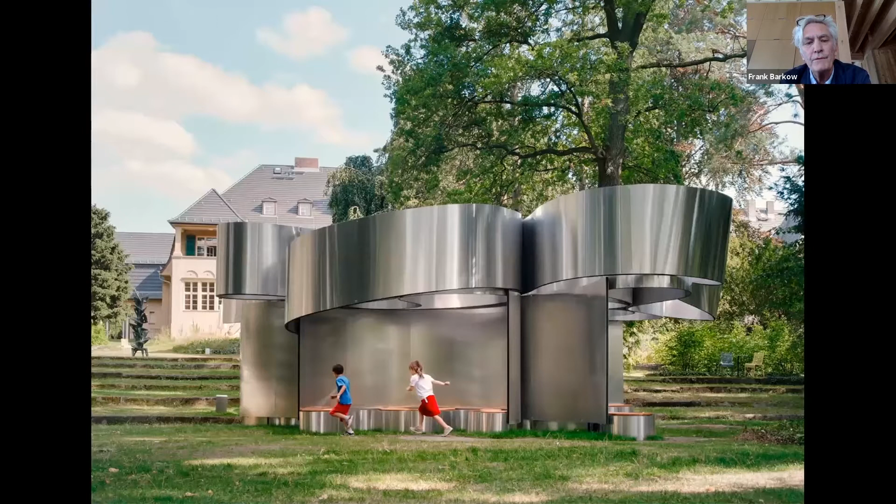This is a pavilion that we moved from Serpentine Galleries in London and rebuilt in Berlin as a kind of prototype—an experimental idea of creating form and space in the setting of this really beautiful garden there.

As an example of the way we work, this diagram shows, as Fabiola was saying, that we work between research and academic teaching at Princeton, where we've been heading studios on housing and affordable housing, and the practice, which is primarily based in Berlin, Germany. So it's a way of working between these work areas.

Timber is something I wanted to give background on, what we've been doing with timber in the last few years. I got tapped on the shoulder by Sarah Whiting, dean of the architecture program at Rice, who asked if we had done any timber buildings. I said, sure, we've got plenty. So these are examples of ideas we've worked with in timber, thinking of it as a modern, forward-looking, even futuristic material, in terms of sustainability and ease of working with it, ultimately earmarked for this project for Hanszen.

This is an example of a cantina, an event space in Stuttgart, Germany, where we used glulam construction in conjunction with steel. This is glulam, digitally drawn and cut, and prefabricated outside of Stuttgart in the Black Forest. It serves as a social space for an industrial campus, where everybody meets: white collar, blue collar workers, clients, employees. As a common space, it was important for us.

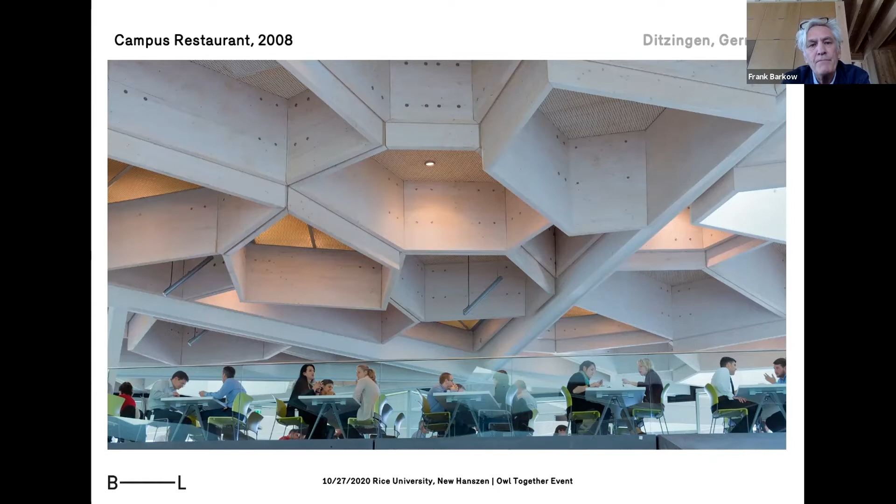But it's also a building where we started producing components that could be digitally fabricated off-site. We could design, fabricate, and execute these building components through our own design, in a sense creating our own building catalog for our own buildings.

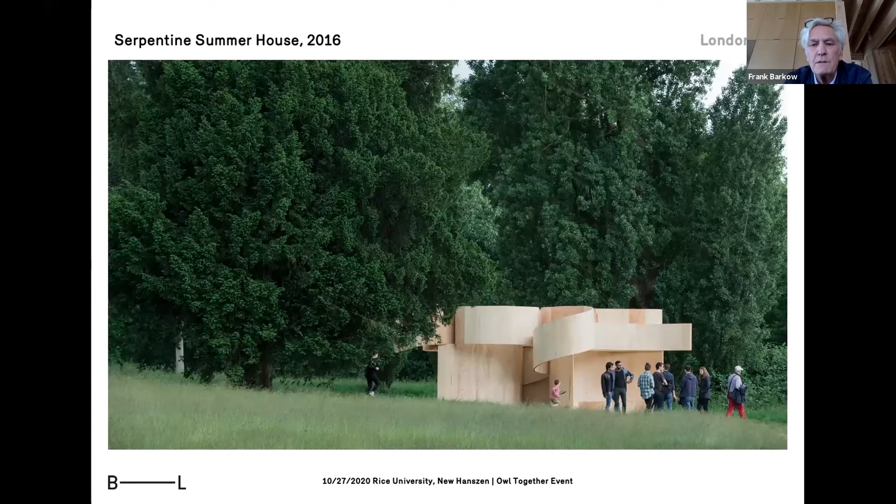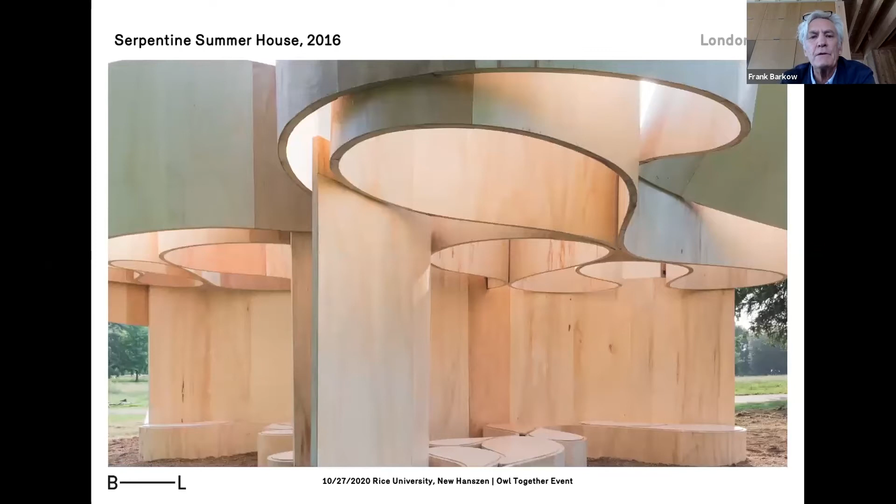The Serpentine Summer House, which you saw a version of earlier, was the pavilion—an experimental project as a prototype that could expand and get bigger. It was built for the Serpentine Galleries, for Julia Peyton-Jones's summer house program, as a temporary structure within the beautiful Kensington Gardens, later moved to Berlin. Really it was to test the limits of material, in this case steel in construction with plywood, the limits of bending it, how it conditions light, how light comes through.

It was achieved through the very simple exercise of folding and looping a material around itself. So the practice is, in that sense, very much hands-on.

This temple-like building in the Swiss Alps is actually a factory. The Swiss are great workers of wood, so they were happy to create this post and beam structure out of local timber, which was glue laminated and built in a simple beam and column system for flexible industrial spaces.

The building could be fabricated very quickly and put up very economically. In a way, these were some of the first projects where we cut our teeth on this idea of prefabricated timber or wood construction.

We also used this approach for other campus settings, such as for Fraunhofer, a famous German research institution, for their campus in Bavaria, also in a very beautiful Bavarian, village-like alpine situation.

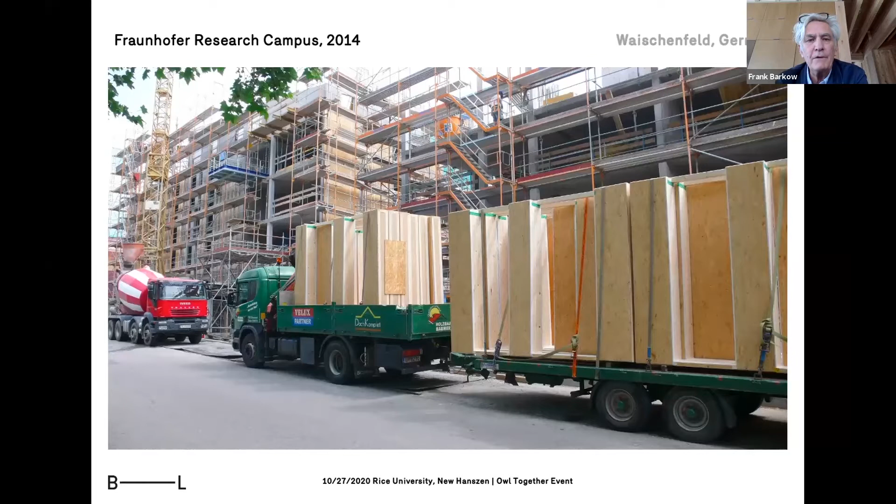This image shows how those buildings are built, where we construct timber components off-site. They're prefabricated and then brought on-site so the buildings can be built quickly and beautifully. This is the entrance sequence. You can see it in relationship to the historical buildings around it, agricultural buildings and barns, and the idea of a timber structure as a common space uniting the four dormitory and laboratory spaces for Fraunhofer, as a collective gathering and event space.

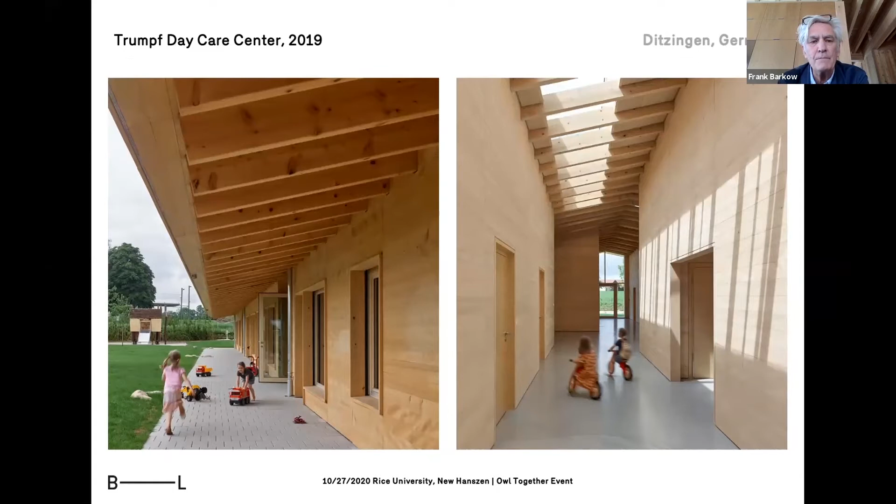These are examples from the last 5-10 years of projects we've been doing, including very recent ones, such as this small daycare or kindergarten adjacent to a factory in Stuttgart, with green roofs that we plant, as well as prefabricated wood components for these small children's classrooms, meeting spaces, and play spaces for gathering—again, a building that could be built off-site and brought on-site quickly, put together economically.

The other idea of timber is like the exhibition we had in Berlin. This one, for the Chicago Architecture Biennial, is to think a bit more utopian—the idea of timber high-rises.

This is something we tried for Sid Rich. We're not quite that far with building legislation, but this is an idea for a high-rise for affordable housing. In this case, very simple, using log construction that's stacked over each other. Timber is very available and very cheap in places like Berlin, as an idea for a future kind of project in the works, an idea for housing. So it's both a very pragmatic, research-based project, but also one that's forward-looking.

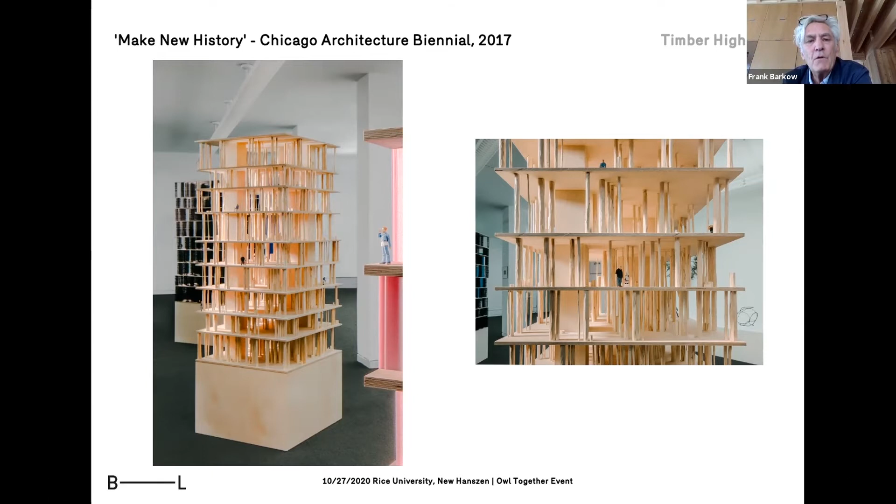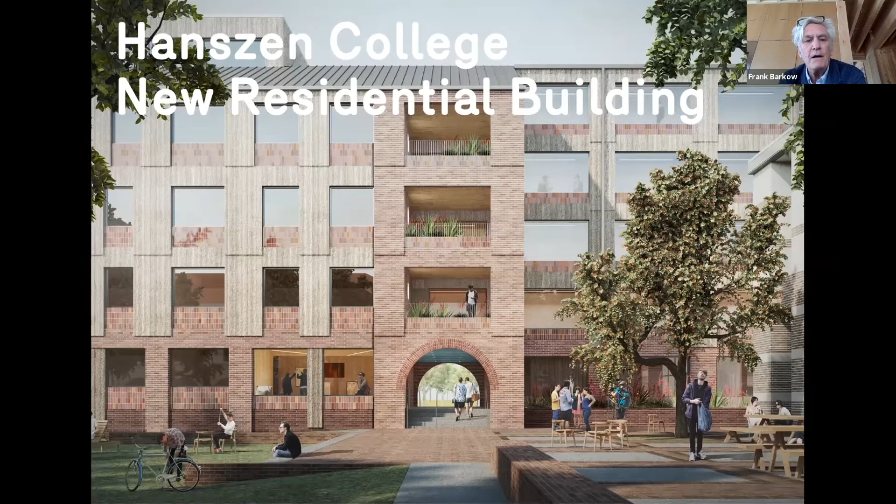So with that as a background to our work and research, I wanted to focus now on Hanszen, the new residential building or wing we've been working really hard on for the last few months. To give you a little background on how the project was started, we went back and looked at some of the histories of Rice. We looked back at the Beaux-Arts plan from 1910.

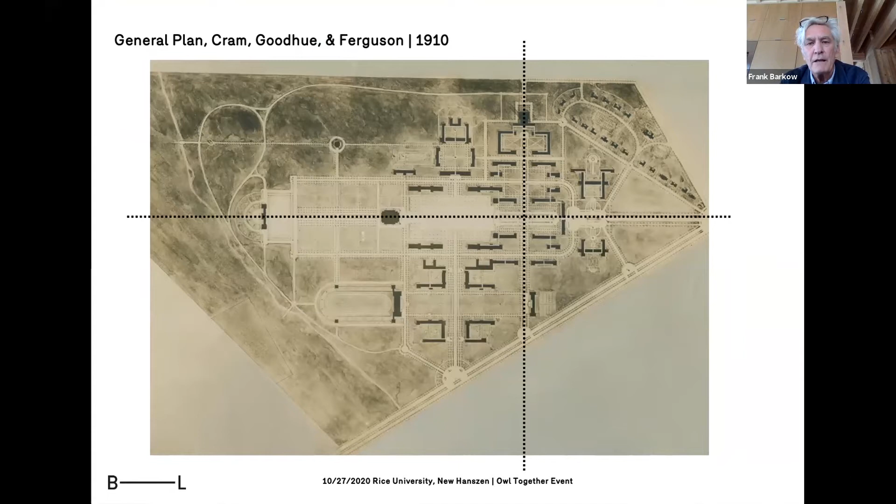Beaux-Arts was the French education style of these large axial, symmetrical master plans. Over time, that master plan has evolved and changed quite a bit from the original conception. At the same time, some of these ideas are still in place. The north-south and east-west axes are still in place. The residential colleges are still located at the edges of the campus.

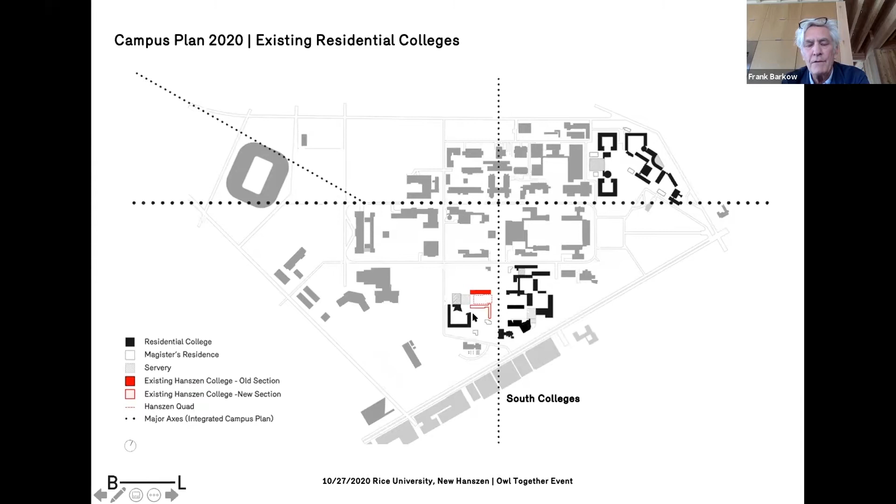We are looking at Hanszen, at this site where the old wing from 1957, the historical wing, is replacing that and complementing it, again to reinforce this idea of a quad space, a collective space between the two buildings in that particular location. So one of the other things we did, because we like to do this as academics, I guess...

...was to do a kind of lexicon or survey of the architecture on the campus of Rice, which is fascinating to me because Rice was always an incubator for architecture over the years, of different styles and phases and movements of architecture, and has a long history of having some of the most progressive architecture in the country.

Of course, the first buildings were in this classical style, which aligned and were consistent with the original master plan, through the 50s and 60s. Modernism made a very strong showing on campus, love it or hate it. I still find a lot of these buildings quite interesting.

In the 80s, postmodern architects of quite renown, such as James Stirling's addition to the architecture building, Anderson Hall, Cesar Pelli's work, Michael Graves, had an enormous impact, I think, on the campus through the 80s, as well as, I think, a collection of quite excellent contemporary buildings from Thomas Phifer's Pavilion, Kieran Timberlake, who are pioneers in sustainability, as well as Michael Maltzan's Moody Center for the Arts.

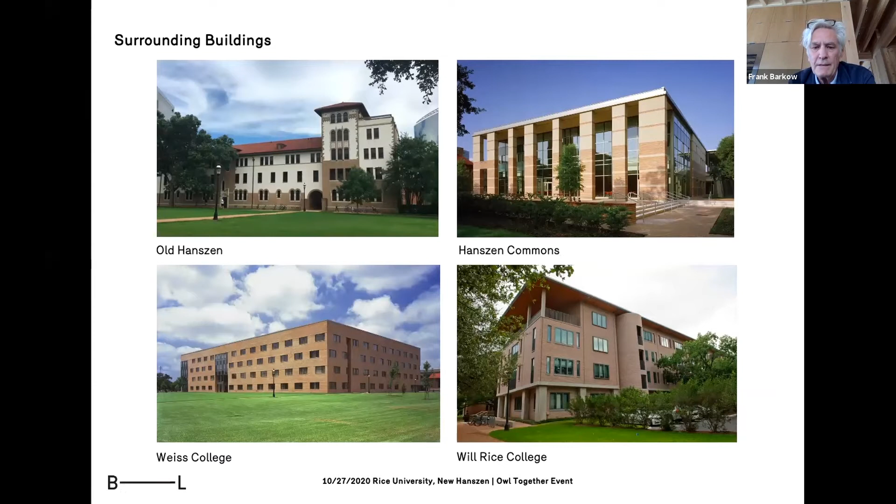The Hanszen Commons on the upper right, which is this more modern building, has a double height arcade facing the quad, as well as the Weiss College building, also from the same architects, as well as the Will Rice College building, which is also a relatively contemporary building.

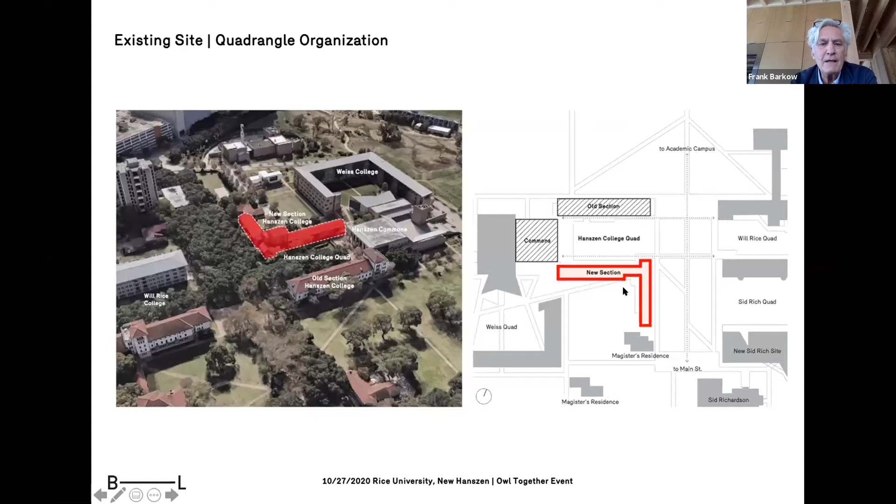So the existing site that we had to work on was in the area of the quad. This red footprint is the existing '57 building. Our site is meant to be located here, shown in red, between the Hanszen Quad and to the south.

The challenge for us was really how to articulate this building mass to fit within this relatively complex site, tailoring it to fit with the idea of generating dormitory rooms and common spaces, and how that might work.

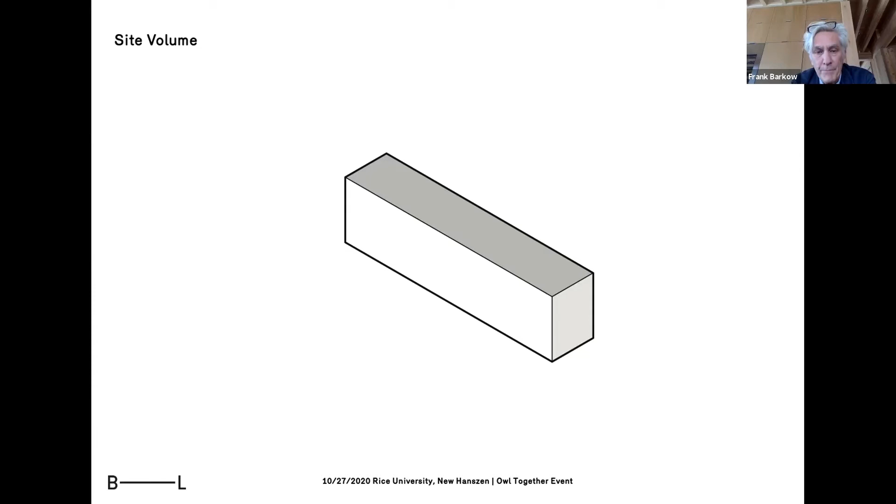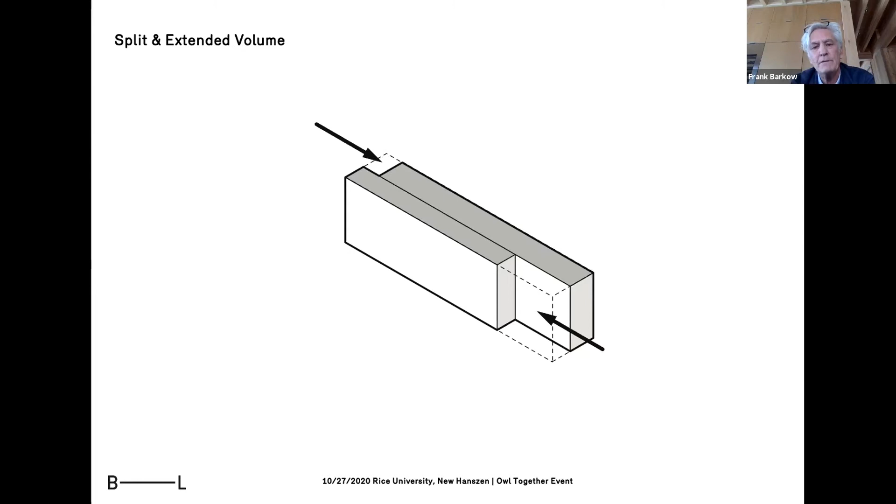So we started with a very simple diagram of the possible building volume that would work with this site, then began to shift and slide those volumes to break down the mass of the building, but also to tailor this volume better to this particular site.

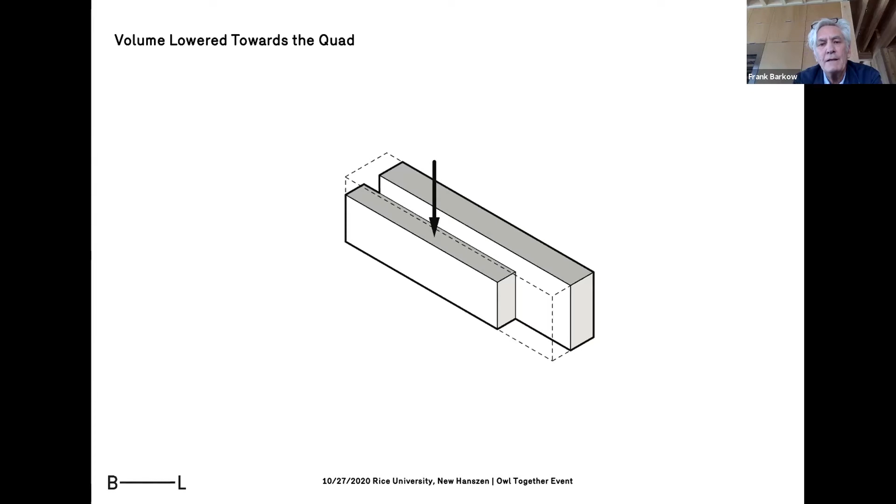Another thing we wanted to do was to lower the building on the quad side, to the left, to bring it more in scale with the historical wing across from it, and to have a higher volume facing south towards Main Street.

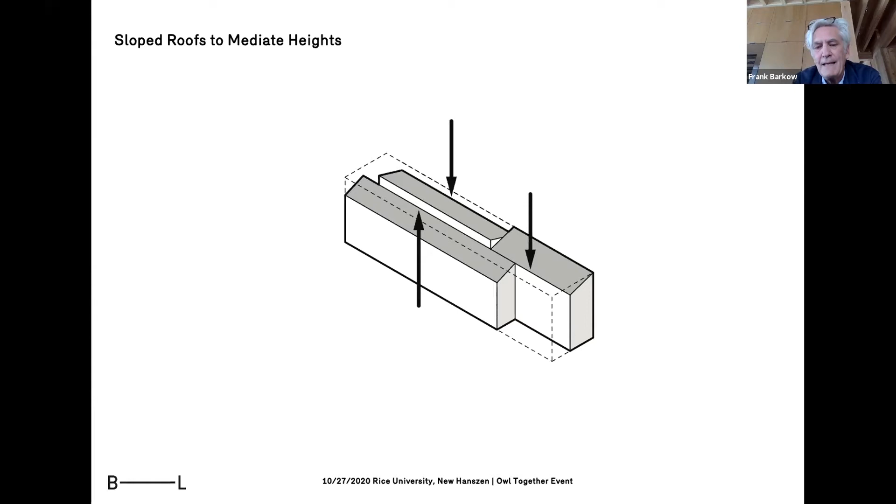The next idea was that Rice is predominantly a campus of roofed buildings, hip roofs, shed roofs, so we articulated the building in a series of shed roofs, again to help scale the building down, but also contextually to put it into a dialogue with the neighboring buildings.

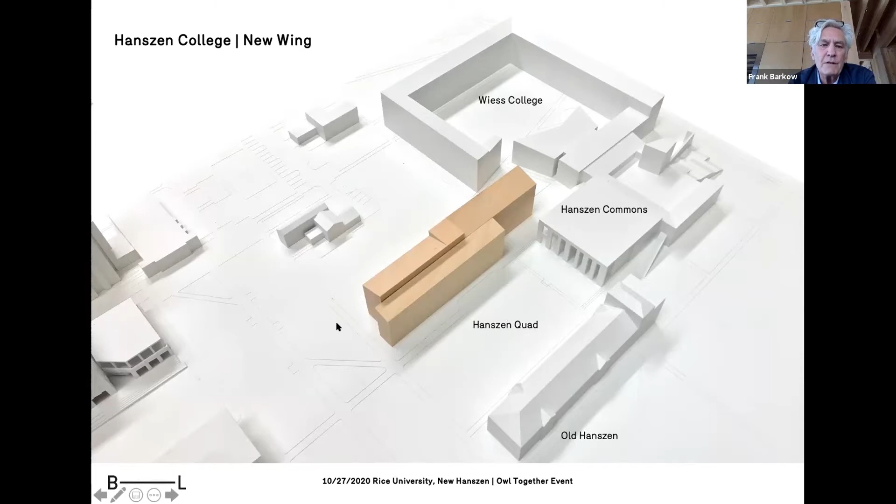In this sketch massing model, you see how the building slips into the space between Hanszen and Wiess, blocking Wiess up a little to the other side, and strengthening the relationship to the Hanszen Quad. That space is something more private, belonging exclusively to Hanszen, as well as having a strong address to the south and to the Grove next to it.

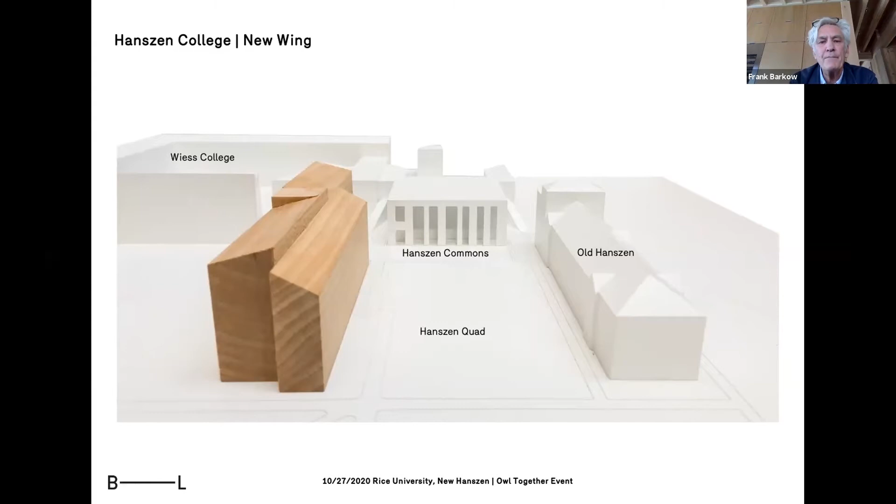In this view, you see how the massing, even though it's a relatively high density building, brings it in scale to the Hanszen Commons and the old Hanszen wing. What I mean by in scale is a similar height between these three buildings that form the Hanszen quad.

This is sort of jumping ahead. This is a sketch model, a model we work with in our shop, that shows some of the ambitions of the facade articulation.

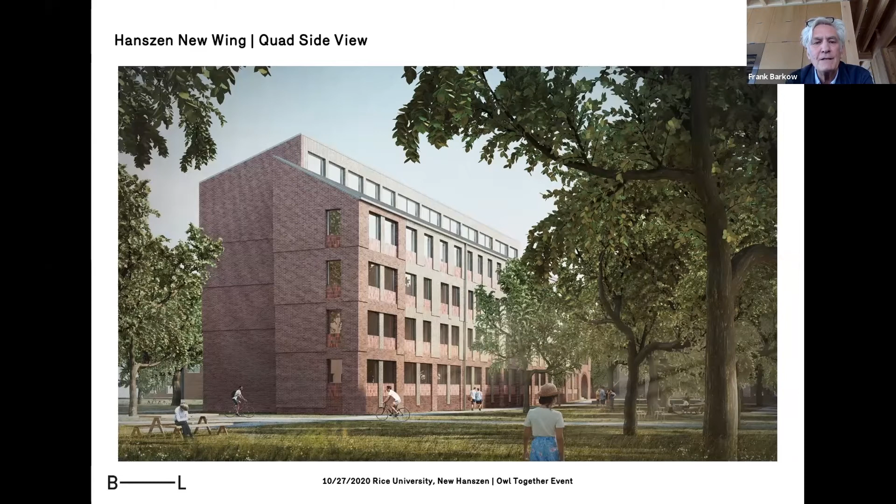We wanted to work with a kind of depth of the facade that's not flat, with the idea of doubling windows - I'll go into this in more detail with the elevations. This is a quick image of the massing and articulation of the building, which you can see better from the quad side, looking from where the grove would be, in terms of the material palette of the building - brick and plaster - and how that's articulated through the massing, as opposed to the south-facing facade, which is a story higher, facing south and to the west side of the campus.

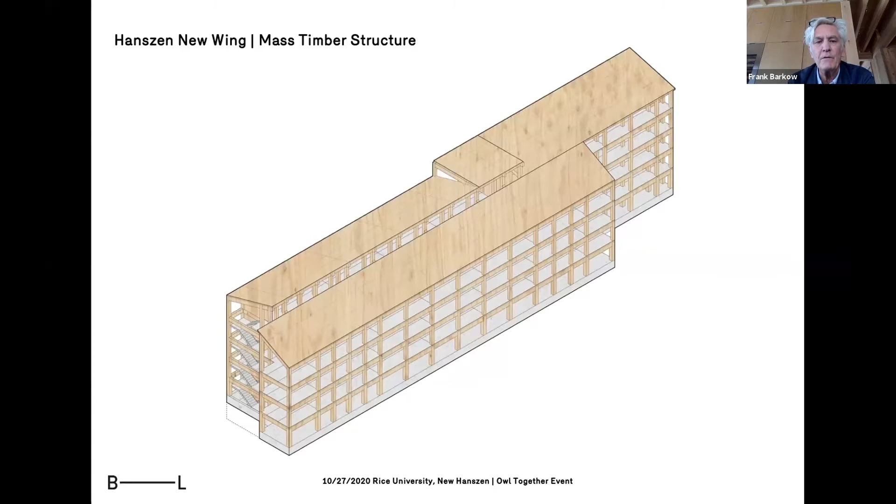Just to talk about mass timber construction specific to this project - again, this is a pilot project, a kind of pioneering project in the sense it's the first mass timber project on campus. The structure is post and beam, meaning you have posts or columns and beams made out of glue laminated timber. The floors are CLT, cross laminated timber, almost like a plywood kind of construction, to create this skeleton or base structure of the building.

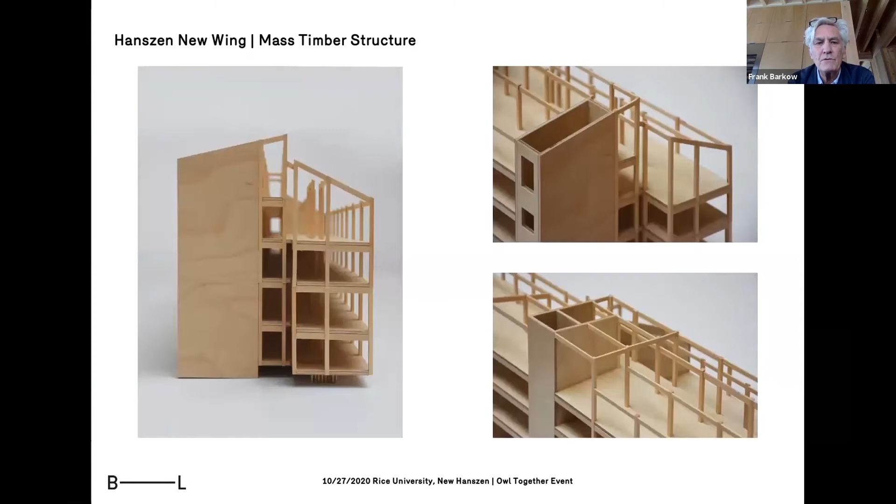Again, it's attractive because it's quite sustainable. It's also a lightweight structure. It can be built off-site and then brought onto campus.

So as said, it's the first mass timber construction on campus. It's already been awarded a grant from the US Department of Agriculture. It will be in line with Rice's environmental agenda, and quite interestingly, though it may not speak for this building, I think Rice owns 50,000 acres of timber in Louisiana, which could in a sense be a kind of crop that could be harvested for future buildings on campus.

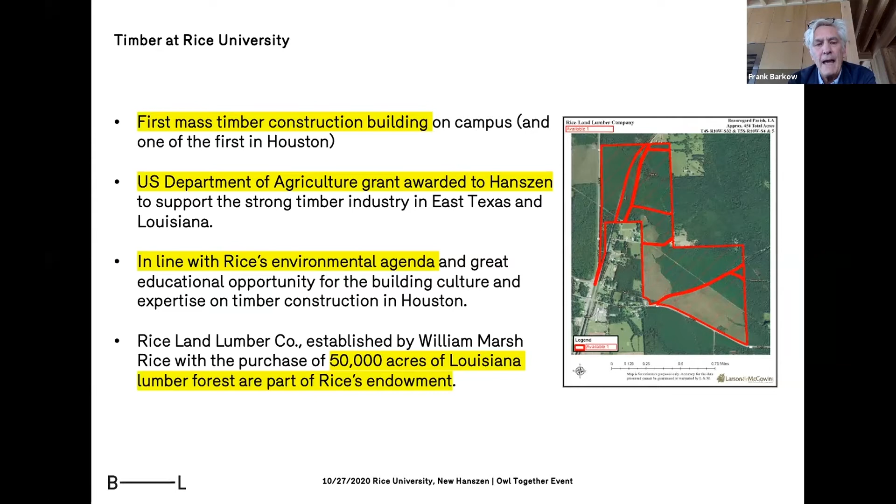So our hope is that with this building we can create a kind of prototype for future construction on campus that provides a low carbon footprint, that has this efficiency through prefabrication - it's economical, it's precise, it reduces time on site, these logical, pragmatic aspects of it - and can be locally produced.

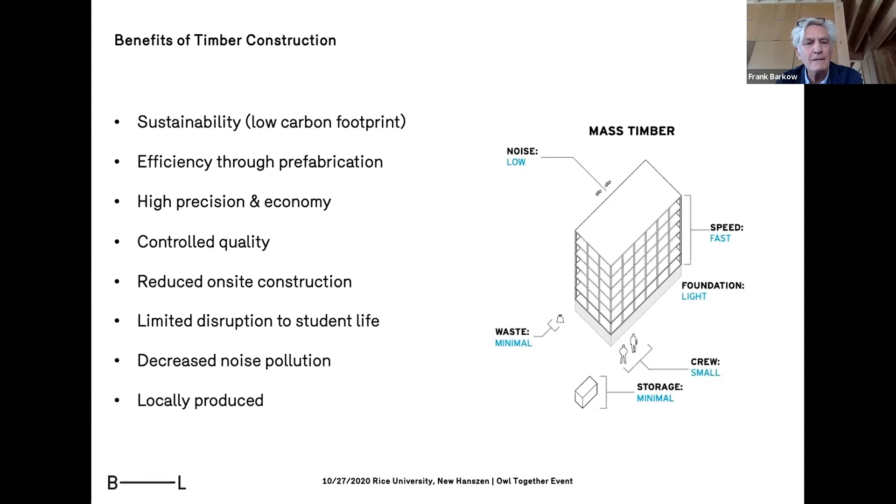But at the same time, I think it's an extremely beautiful material, very haptic, warm. You can see the timber in glulam construction behind my screen here, from a house I just completed in the same kind of construction, which is an extremely livable material to be around.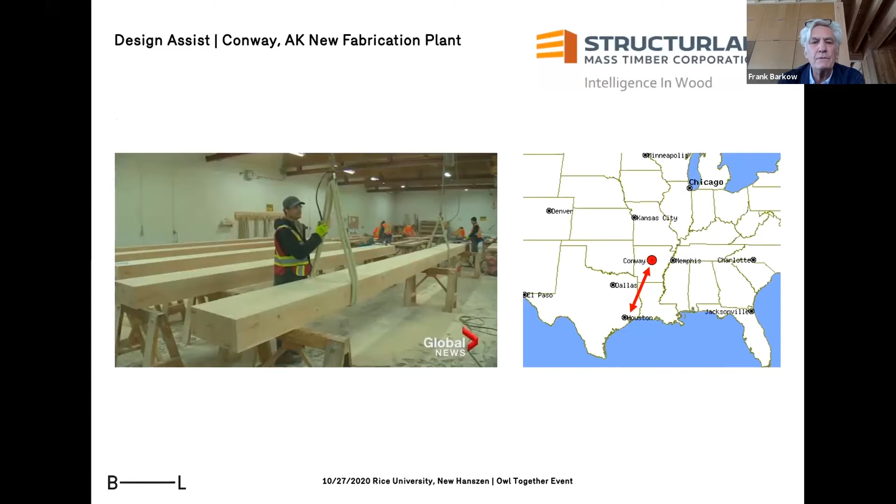In terms of logistics, we can build this building in Arkansas, in Conway, and just ship it down to Houston. So in a sense, it is a regional material that can be sourced from not far away. As I said, it's extremely beautiful.

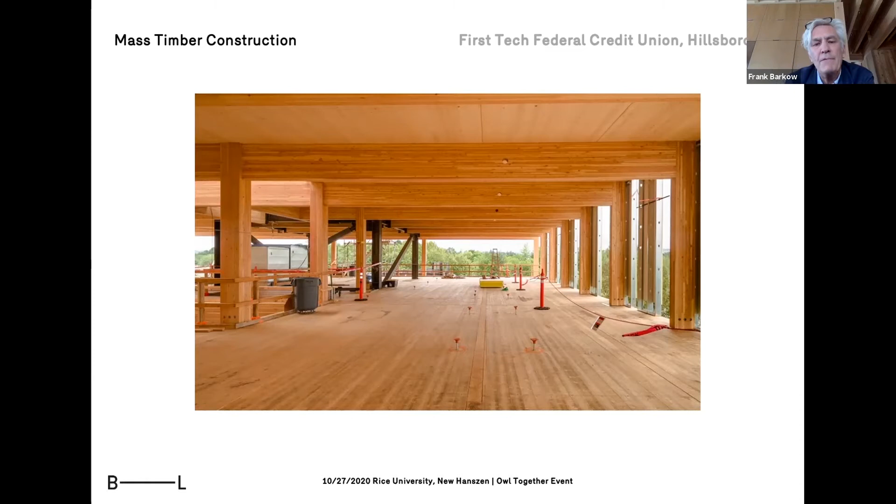This is an example in Oregon of post and beam construction in glue laminated with a CLT. Again, this cross laminated timber floor decks, which we will then coat in concrete to improve the acoustical performance of them. So it's quite a cool material in the sense of its ease of moving and its aesthetic beauty, I think.

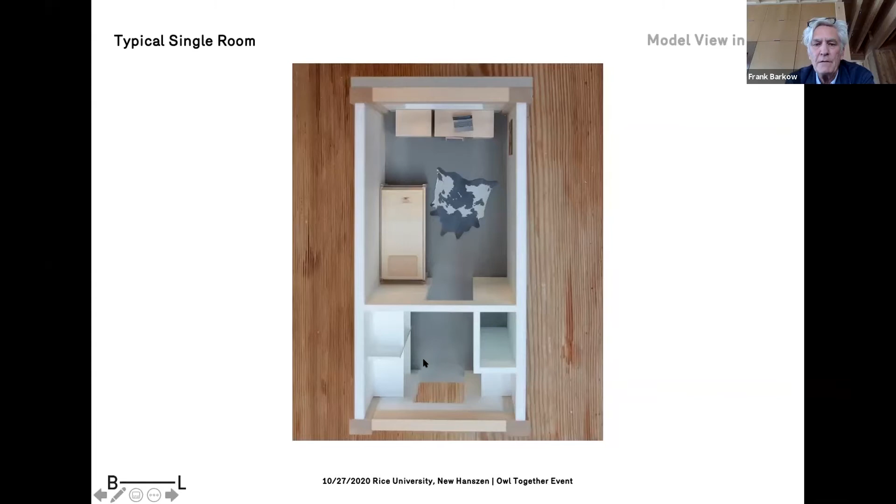The new Hanszen dorms, to zoom in on the building itself, we're developing single rooms, doubles, and RA rooms. So this is an example in our model. This is kind of a view looking from above down into the room as a single here with a storage space here. The bathrooms are shared in a common hallway.

Which look like this from the inside, a study space, a bed. It has a certain amount of flexibility in terms of how you furnish it, how you can move the furnishing around. But what you can see is the sort of visibility of the construction.

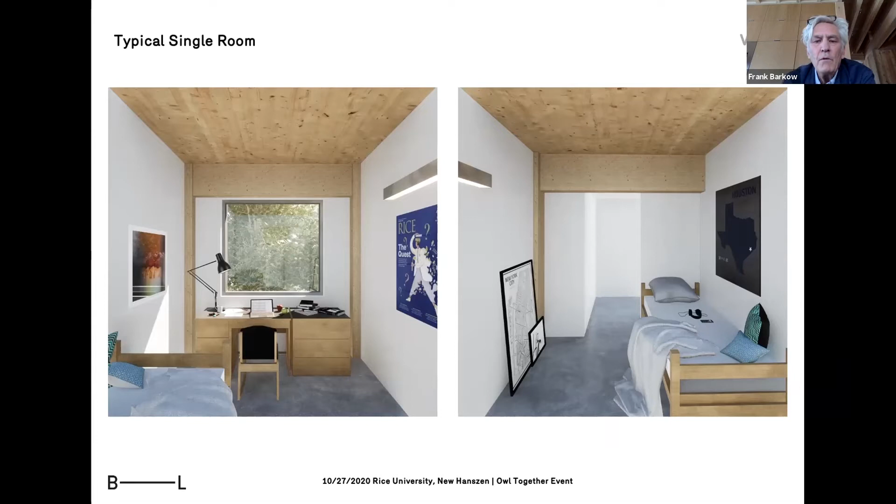So the ceilings will be the exposed timber, as well as the beam or header over the window, and columns are visible. The concrete floor will also be visible. So the rooms will be quite robust in a way. I think we wanted to achieve a kind of loft-like character for these spaces.

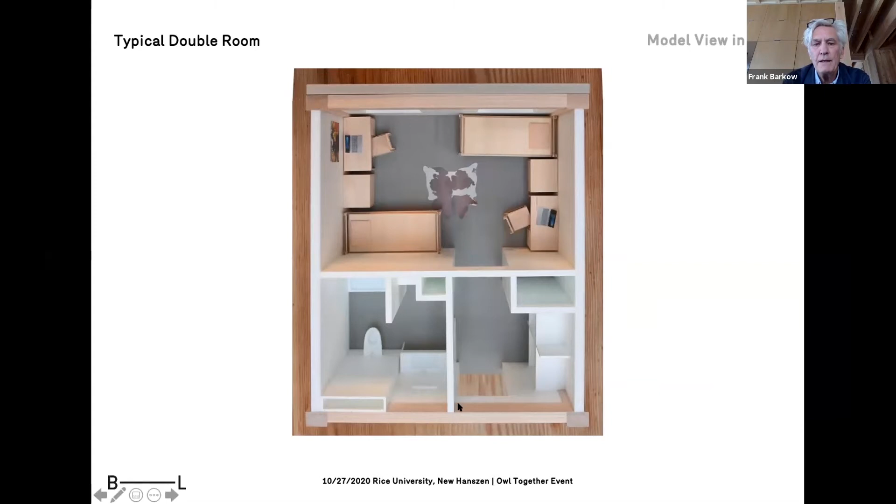This is an example of a typical double room, again, which is flexible, which has its own designated bathroom. Here, a kind of entrance foyer with storage as a base type, or the majority of the rooms will be this kind of room, with both looking at the window or facade side and looking back towards the entrance and the view.

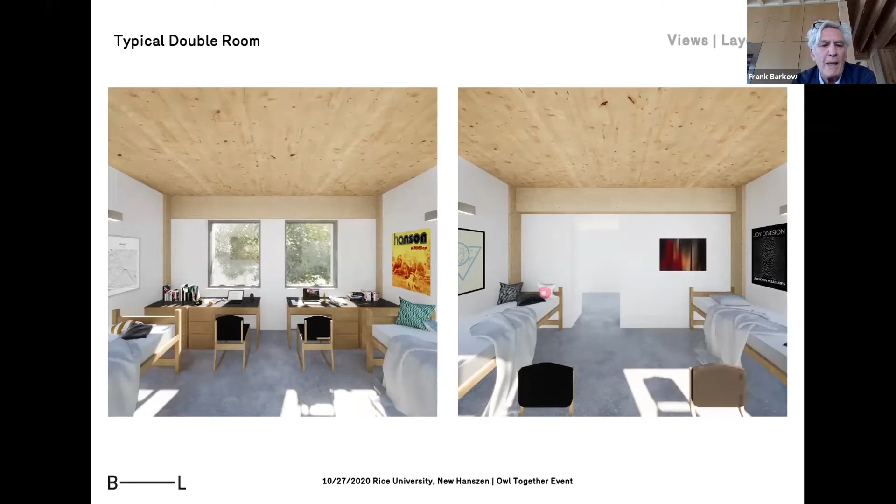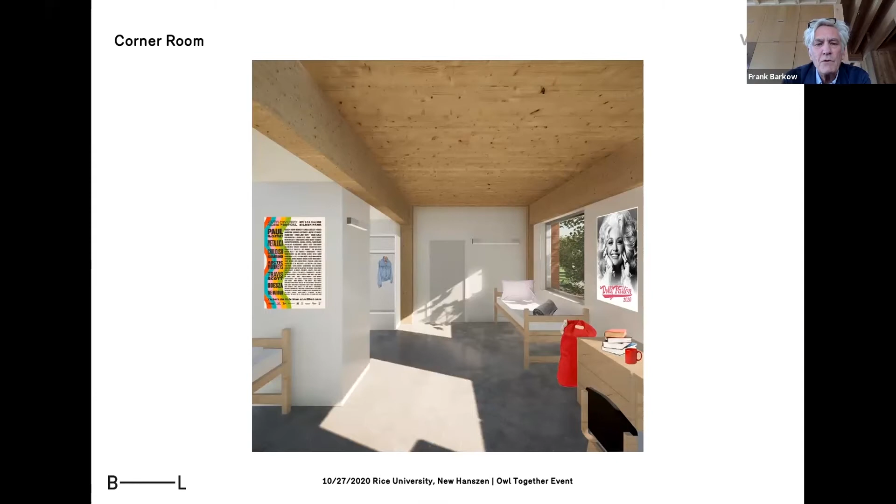On the right, again, can be flexible, can be rearranged in terms of furniture, beds, desks, however you want to use it. And then we also have corner rooms, which have windows on the corners, views in both directions. These are double rooms, which are quite nice. You even get an extra window here next to the Dolly Parton poster, which we can provide.

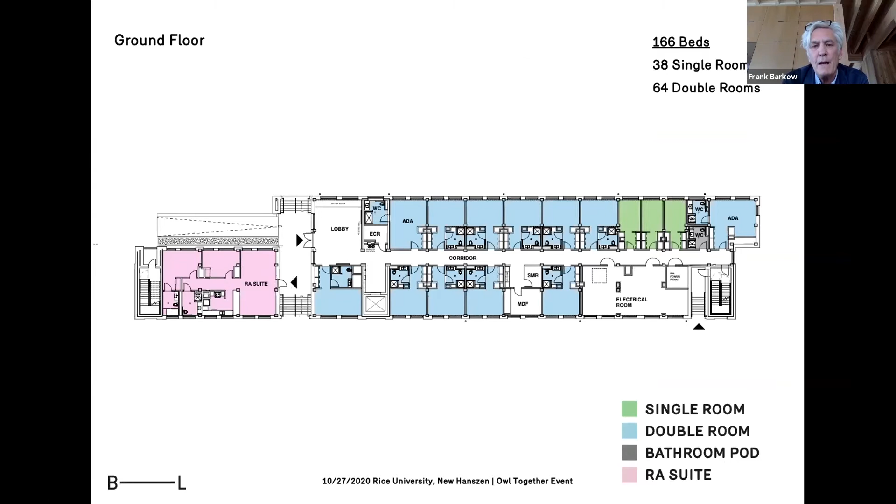And you can see the distribution of single rooms as well as double rooms at this floor. A typical floor works this way with this combination, and again, we have 38 singles to 64 double rooms, but you see the distribution of rooms in this floor plan. And you can also see we generate common spaces such as these outdoor terraces or loggias, I'd call them, on the corner here, as well as places in the corridor where people can sit and work or meet and talk.

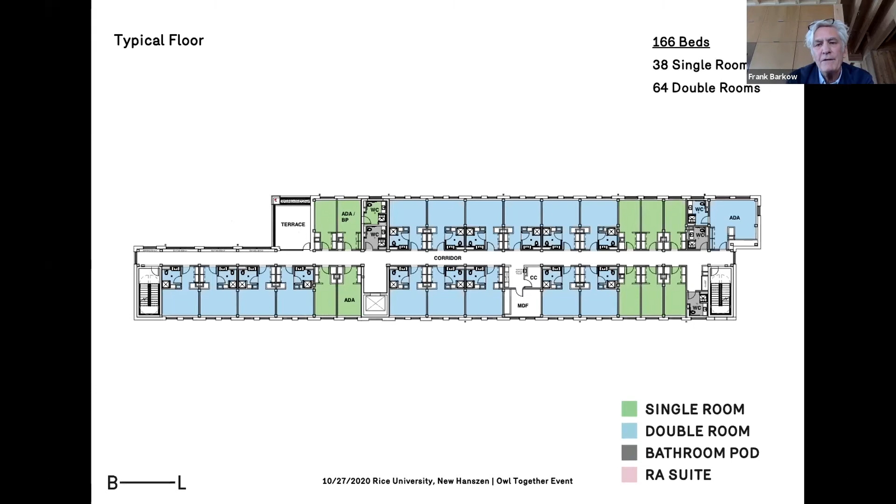So to be as efficient as possible, but to generate as much architectural benefit as we can with a building of this type. The fifth floor, or the top floor, becomes a kind of single loaded suite of rooms, both double and single, as well as another RA suite here. As you remember from the model, this has a clerestory lighting to the corridor.

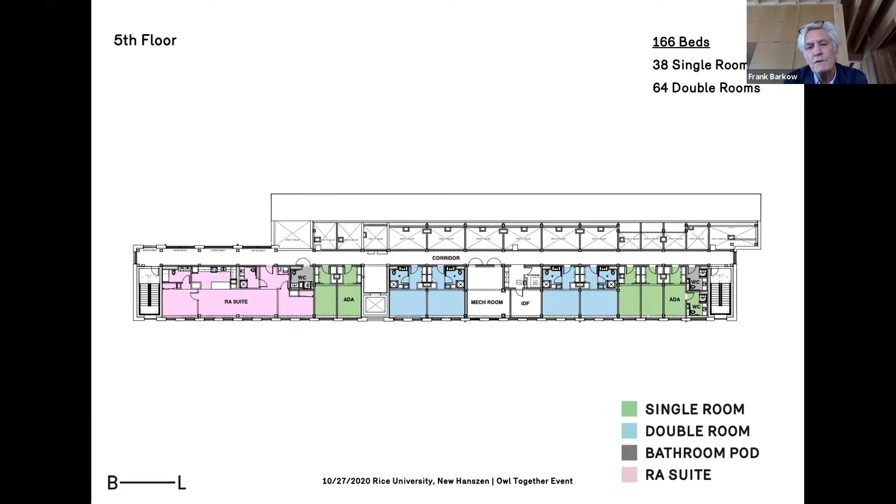These rooms also have a kind of higher roof or shed roof over them. So I think it generates a lot of differences in terms of types of rooms and where they're located, views and orientation. So in a sense that will be quite dynamic in these floor plans.

The RA suites are super nice. The one on the ground floor has light and view orientation on both sides. Similar to the rooms, the singles and doubles, we also wanted this to have a kind of rough and ready, loft character to concrete floors, again exposing the construction.

Timber wherever we can, and generate another RA suite at the fifth floor, which is daylit and has views on one side, but has the added benefit of these high sloping shed roofs on this higher space. So this is an example of what that space would be like.

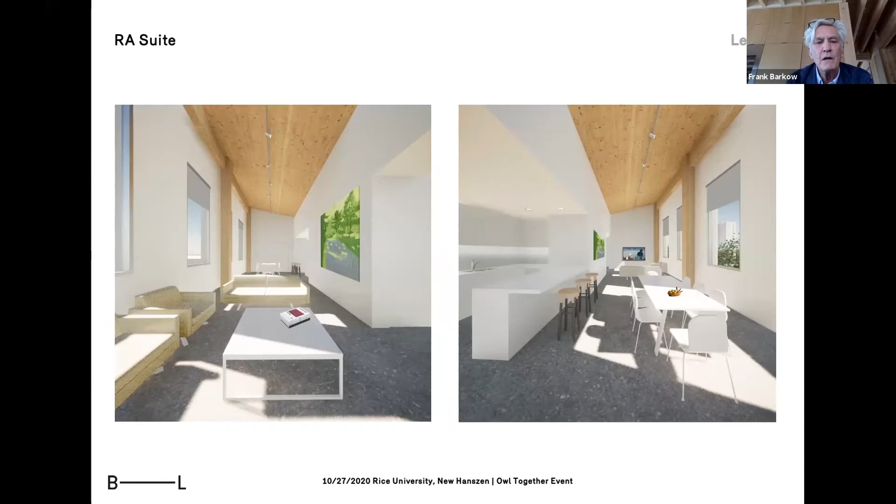Again, loft character: open kitchen, open living and dining space, forming kind of enclosed loft spaces.

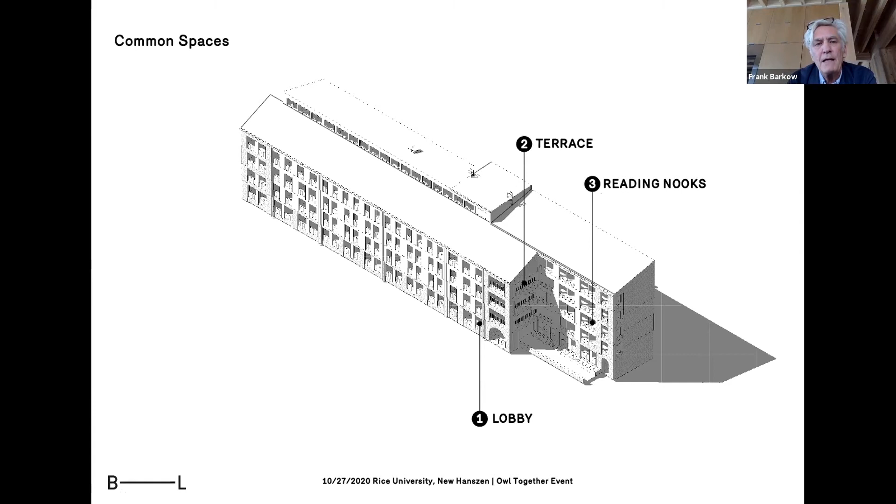The common spaces I talked about include the lobby, designated as a common space, these three exterior terraces or loggias given over as common spaces, and the reading nooks along the corridor on the upper levels. The Commons building is down here to the left, adjacent to this building, but even within the new building, we wanted to generate as much common space as we could.

In the drawing here, this is an example of the lobby space where you could sit and hang out. There's a chalkboard, a pinup board in the back, and a screen, so you could project movies, get information, or use it as a meeting point. But this is really the entrance to this residential wing.

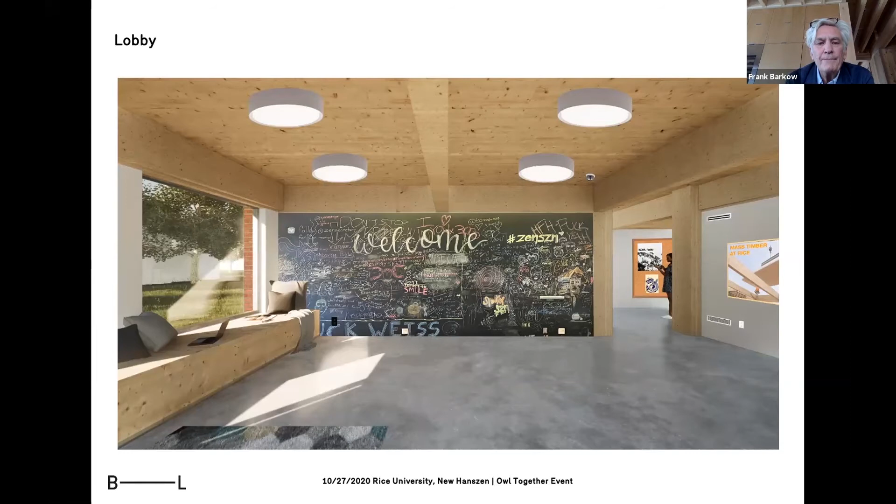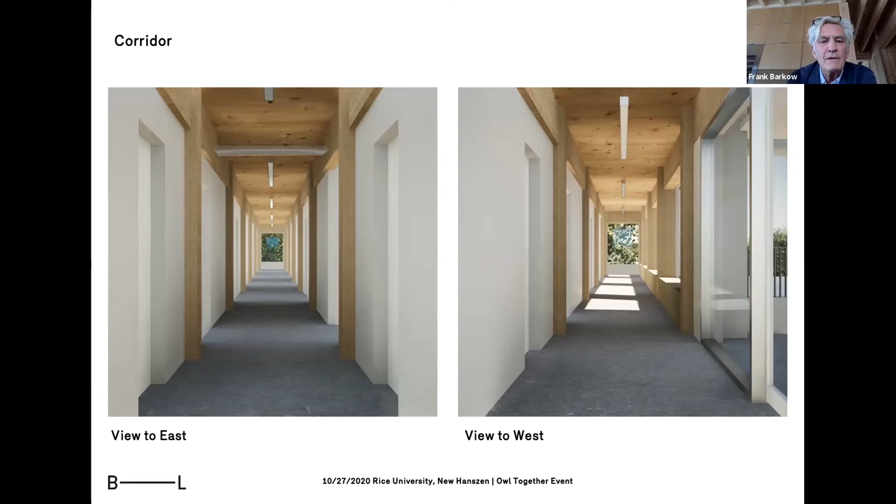Other spaces, like the corridor, want to have some quality of their own, again expressing the structure. There are views out of the corridor on both ends and on the right. It's daylit where it slides, and that shifting plan brings daylight within there, as well as places to sit and work within the corridor while waiting or hanging out, shown in a bit more detail here, where you can sit, plug in, and meet people.

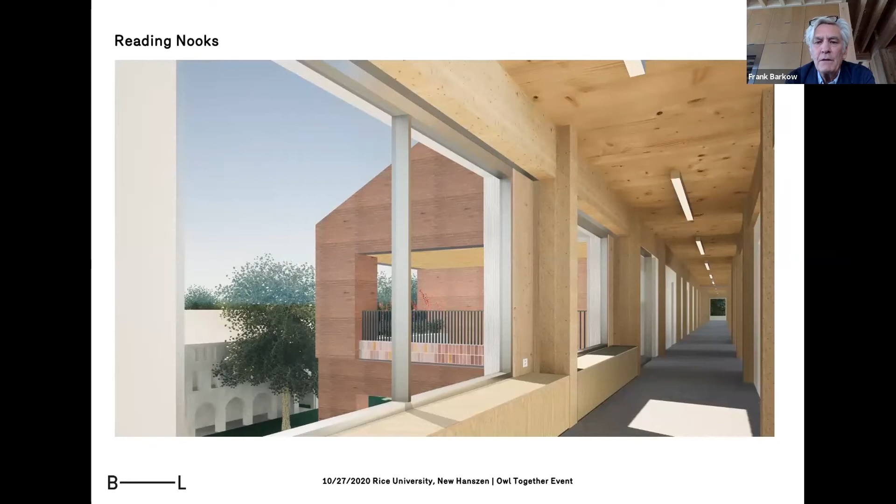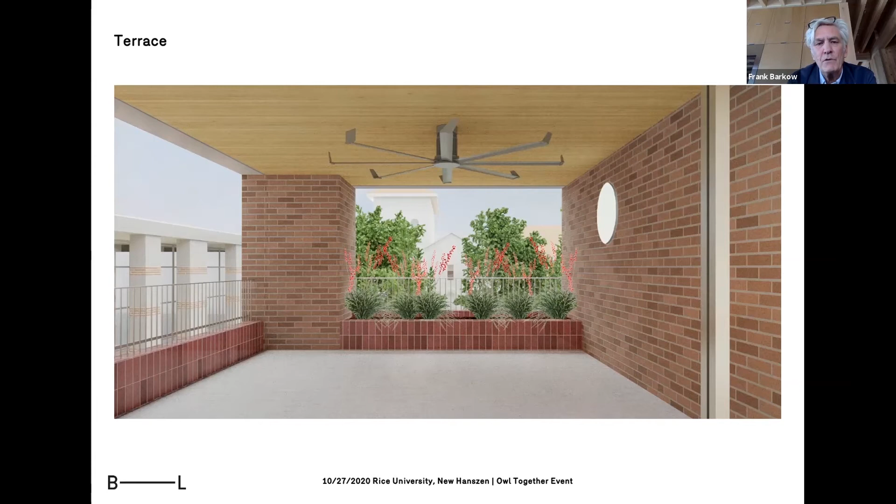This also has the added benefit that it's adjacent to these outdoor terraces, which you can use for workspaces, meeting spaces, or party spaces. So that's an added benefit: the corridor and how it connects to these outdoor terraces or loggias, as I would call them. The facade is another sort of theme within this overall building.

We've been working hard and intensively, in the last couple of months, doing lots of Zoom conferences and meetings on this issue. But the idea of the facade was that we see this as a modern building, and we wanted to do a modern, progressive, forward-looking building, but also wanted to understand the history. The history of Rice was that residential colleges would be slightly different than institutional or classroom buildings, using plaster, using brick, producing a more vernacular kind of architecture. So this nonchalance or informality was something we wanted to register in this new building.

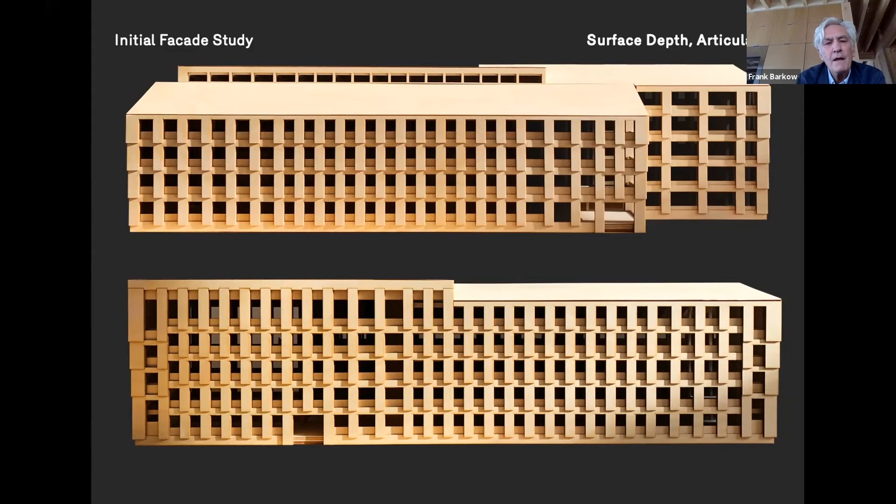We wanted the facade to have a kind of surface depth. It works in a shingling fashion of stepping over, taking advantage of the strong southern light—this idea of light and shadow articulating the facade, not simply being a flat surface that's either in light or in shadow, but playing with the depth of that.

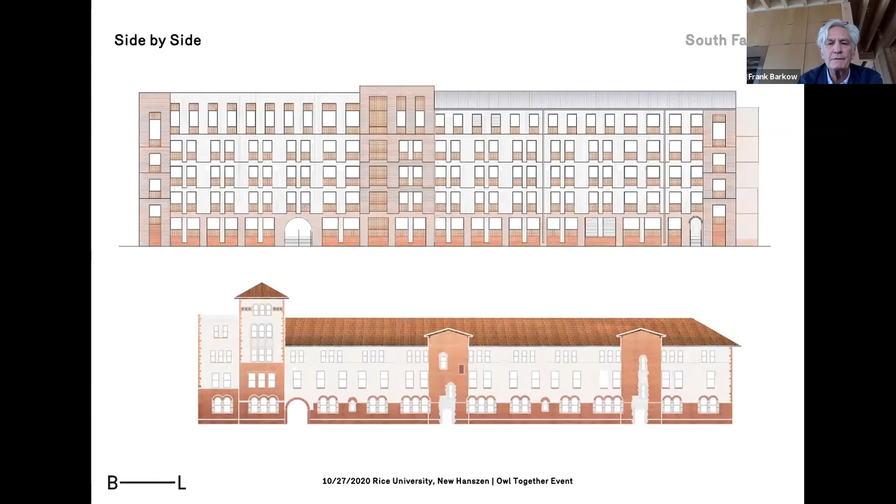In the more recent versions of this facade, we started to give more hierarchy and a more dynamic facade in terms of pairing windows. If you look at the historical building, you see how windows are grouped, how they're offset, sort of quoting the arched entrance passage through here, riffing on this idea of towers—marking or forming a tower-like element both at the entrance and bookended at the other side, as well as on the end here, as a way of referring to the historical buildings without copying them directly.

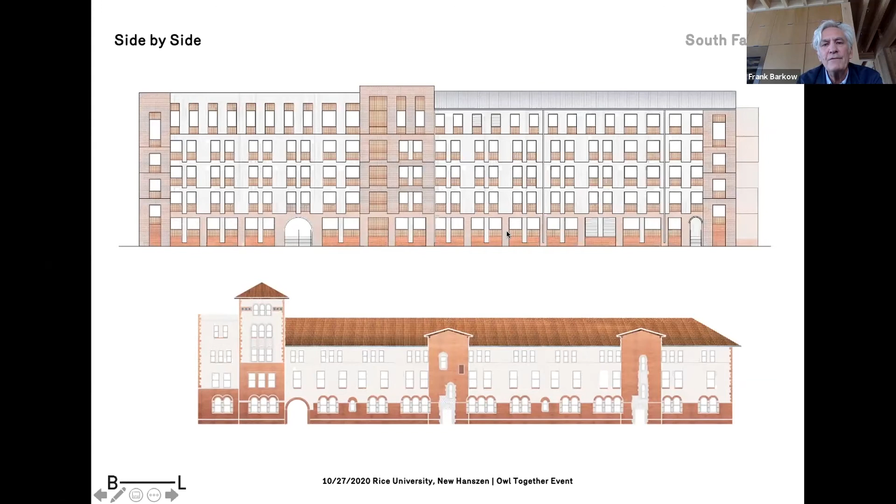Again, this is a palette of plaster, a metal standing seam roof, brick in the towers, and tile infills in and around the windows. So the palette then looks like this. On the right is the St. Joe brick from Louisiana, which is typical to Rice University.

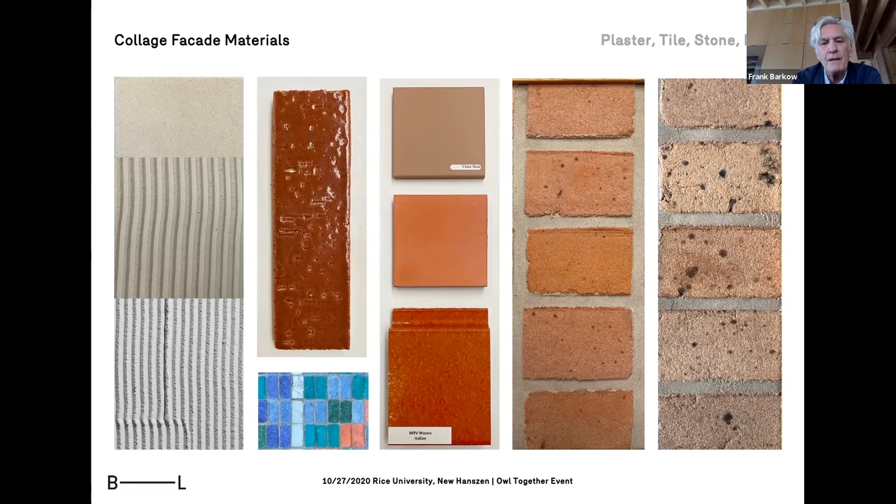Beautiful tiles in terracotta, even salvaging some of the mosaic tile from the 1957 Hanszen wing, which we'll use in the entrance ceiling or soffit, and plaster. Even that material, not simply putting it flat, but raking it, giving it a texture which plays in light and shadow, so the materials have a kind of richness and depth in themselves within this building facade.

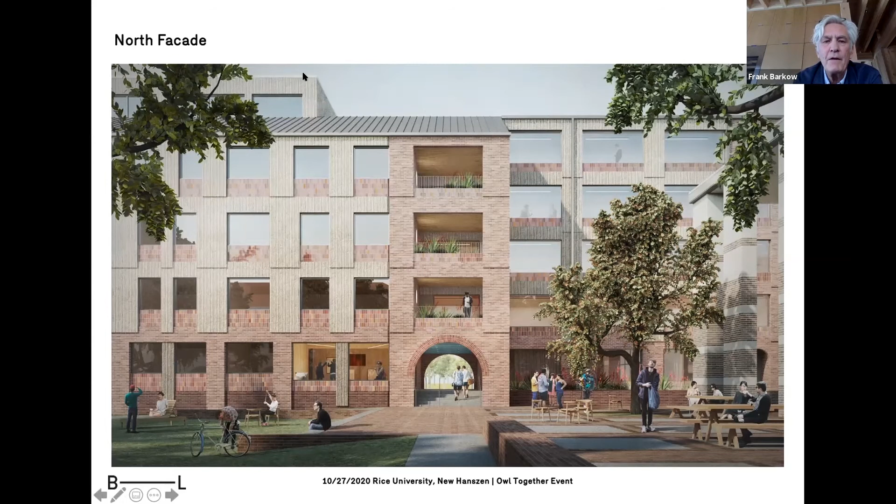So you could see where those materials would be placed within the facade. This is the plaster, these are areas for the tile. You can see my cursor, and the brick and the base, and again these tower elements here. This is pronounced at a corner, where the entrance throughway to this Hanszen wing is, with three open air terrace loggias above it, and a standing seam metal roof above that. These windows here are the clerestories which light the corridor at the fifth level.

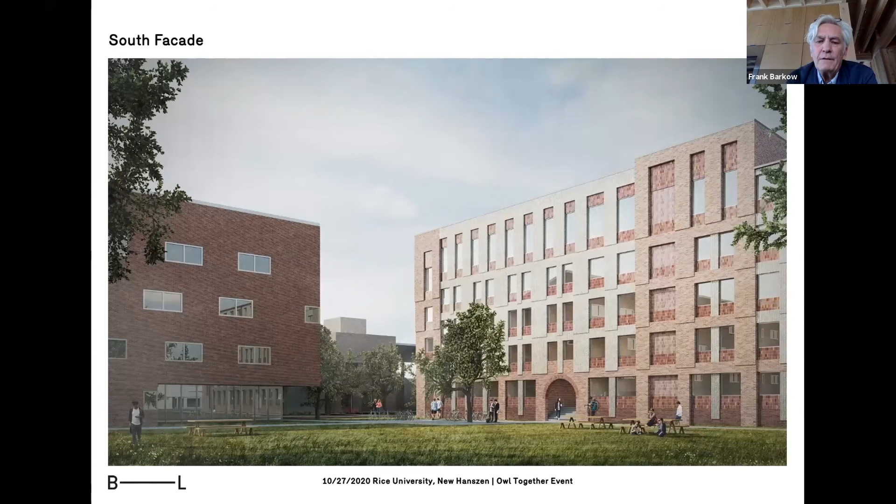So in contrast, in a way, to Wiess, which is a very simple, kind of punched facade, ours is much more articulated, I think materially more diverse, and more in line with the historical quad at this view looking to the south.

Iconography was another aspect, a particular history to this college in terms of the terracotta panels, the Guardian, the Passage - things we want to make specific to this college. The blue tiles, by reinstating some of those ideas such as the Passage, are something we want to salvage and reuse, replace or relocate.

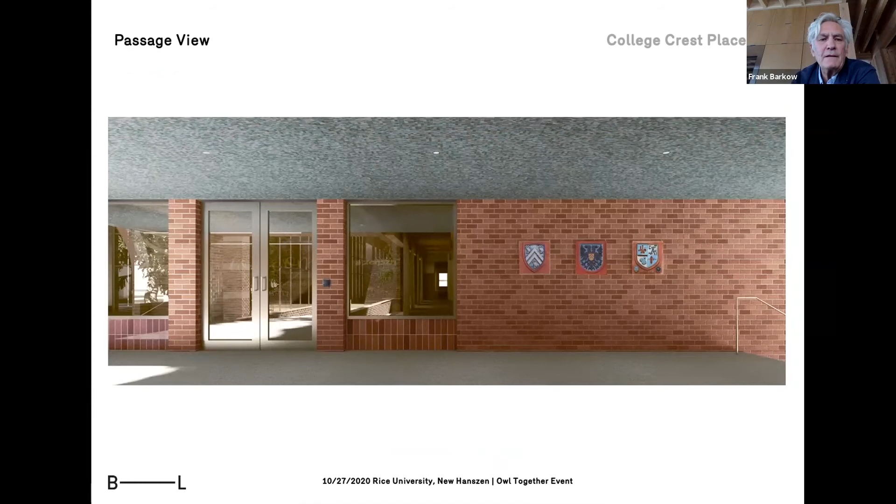One of the things we wanted to bring on board were the college crests and mosaic tiles, which are quite beautiful, and to bring them into the new building. So the crests can be located here through the Passage at the entrance to the Hanszen lobby. And this soffit or ceiling, I think we have enough material to place those really beautiful mosaic tiles into that ceiling space, which again play very nicely in the changing light.

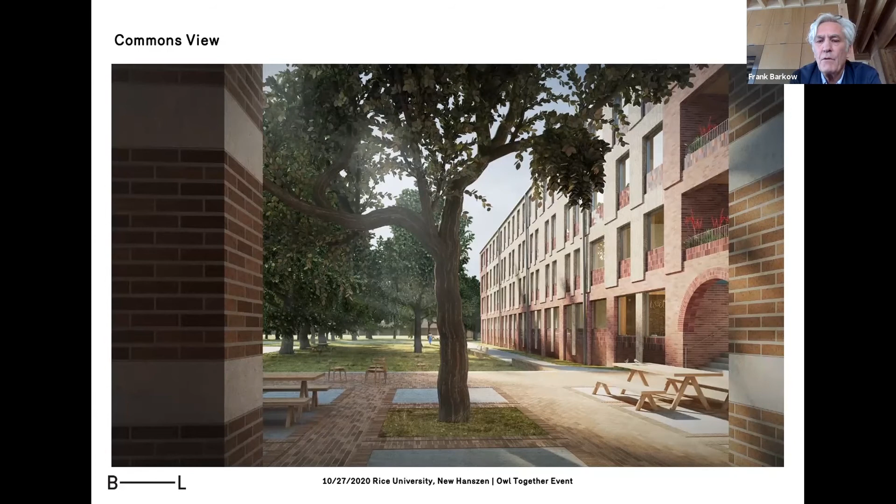So this is a view from the Commons, which is to say we want this to be an integrated building. We want there to be an ongoing dialogue between these buildings to form a new whole, a new entity with Hanszen, particularly for the quad. And again, as a place, not simply to go to sleep at night, but really a place to reside, a community that this will provide, a place to learn, a place to study, and, as I did in college, really a place to meet friends for life. So it's important as a piece of architecture, but I think it's also incredibly important as a place in a particular time.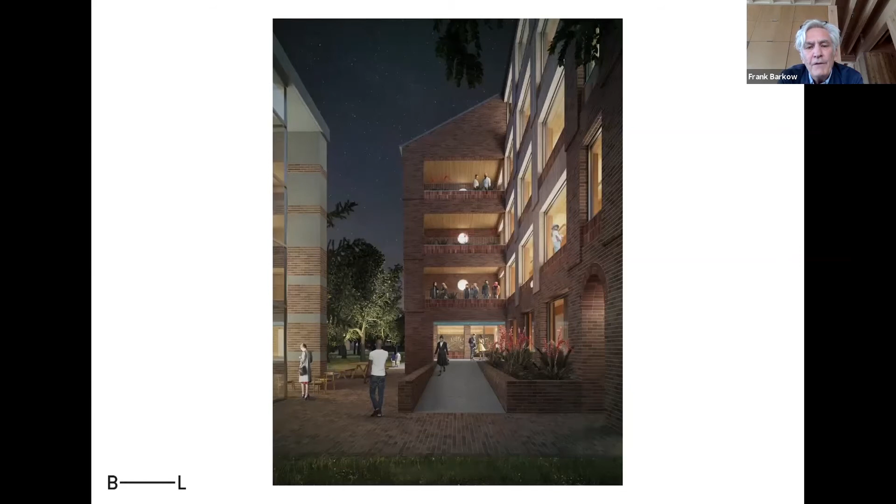So I'll finish with this slide. And thank you for your patience. This is one of the, I haven't done a lot of these Zoom presentations, but thanks for bearing with me. And I hope that the presentation was enlightening to you.